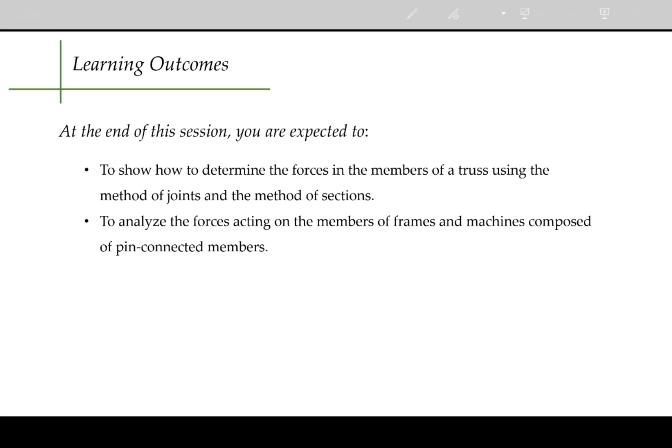Let me just go over my slide for frames. Okay, frames.

Frames and machines are two types of structures which are often composed of pin-connected multi-force members, such as members that are subjected to more than two forces. Frames are used to support loads, whereas machines contain moving parts and are designed to transmit and alter the effect of forces. Provided a frame or machine contains no more supports or members than are necessary to prevent its collapse, the forces acting at the joints and supports can be determined by applying the equations of equilibrium to each of its members. Once these forces are obtained, it is then possible to design the size of the members, connections, and supports using the theory of mechanics of materials and an appropriate engineering design code. This part, designing the size of the members, is covered under mechanics of materials, for which statics of rigid bodies is a prerequisite.

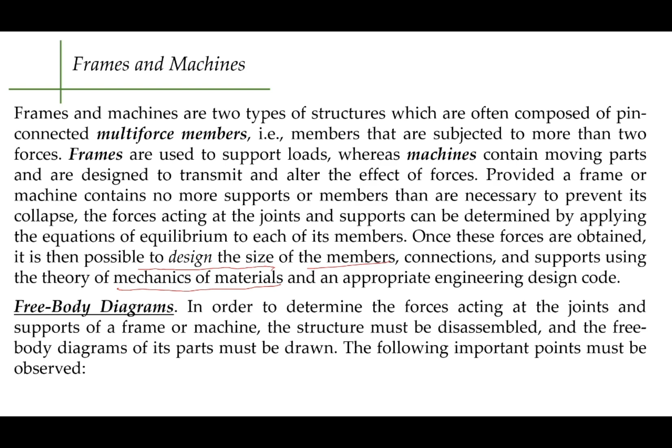So how are we going to solve for frames and machines? First, free body diagram. In order to determine the forces acting at the joints and the supports of a frame or a machine, the structure must be disassembled and the free body diagrams of all its parts must be drawn. The following important points must be observed: 1. You have to isolate each part by drawing its outlined shape. Don't worry, I will have an illustration later on.

Then show all the forces and or couple moments that act on that part. Make sure to label or identify each known and unknown force and couple moment with reference to an established X and Y coordinate system. Also, indicate any dimension used for taking moments.

Most often, the equations of equilibrium are easier to apply if the forces are represented by their rectangular components, because we will be doing summation of forces x equals 0, summation of forces y equals 0, and summation of moment equals 0. Following the Varignon theorem, it is much easier to solve if your forces are resolved into x and y components, because the perpendicular distances of these forces are much easier to locate.

Identify next all the two force members in the structure and represent their free body diagrams as having two equal but opposite collinear forces acting at their points of application. For a discussion on two force members, please go over the equilibrium of a rigid body discussion. By recognizing the two force members, we can avoid solving an unnecessary number of equilibrium equations.

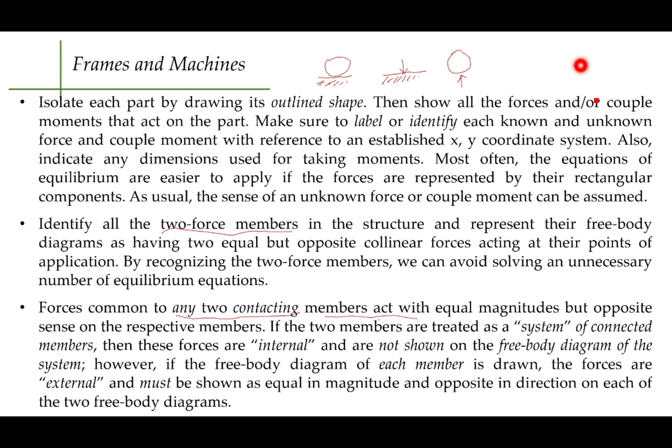Now, for this part here, common to any two contacting members. Say, for example, if you have your roller here and then your surface. If you look at it in the perspective of your surface, your roller will exert a downward force. But in the perspective of your roller, your surface exerts an upward force. This is to maintain equilibrium. This is what it means when I say forces common to any two contacting members act with equal magnitude but opposite sense on the respective members.

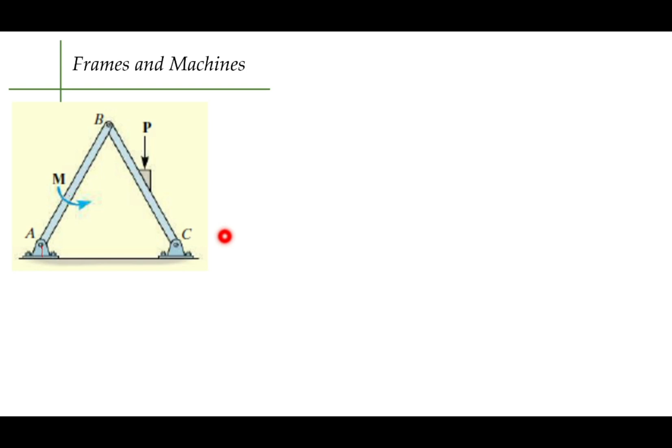This is an illustration here. Let's say we have this frame, we have a load P here and a couple moment at this point. First and foremost, you have to determine the support reactions. Both A and C are pin connected. So let's say we have a force here, force here, force here, force there. We have AX, AY, CX, CY. Because we're going to apply the equilibrium equations, we can determine AX, AY, CX, and CY.

But there are certain cases where, from this initial writing of your forces, you cannot determine your support reactions yet. So you have to dissect more deeply into your frame. For example, this one, we'll have one member here, this member, and another member.

Now for member AB, we retain our AY going up, AX going to the right. Now, if we say that our BY at member AB is going down and BX is to the left, then when you proceed to the next member, BC, you have to make sure that your BY and BX follow the opposite of the firstly assumed direction. So for BY at member AB, you assumed going down, so at member BC it has to be going up. And for BX in member AB, to the left, so at member BC it has to be to the right. That is how you maintain equilibrium when dissecting your frames.

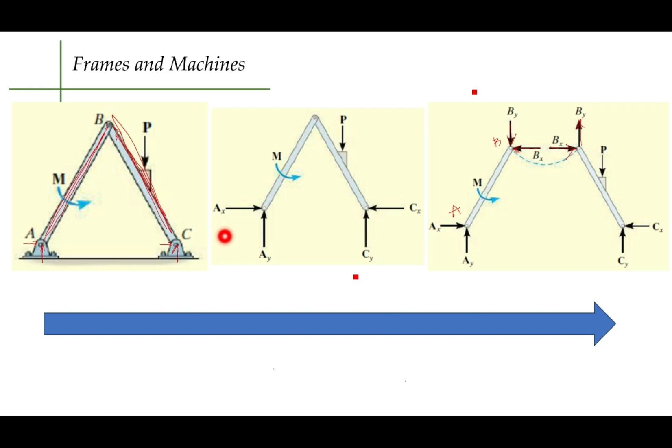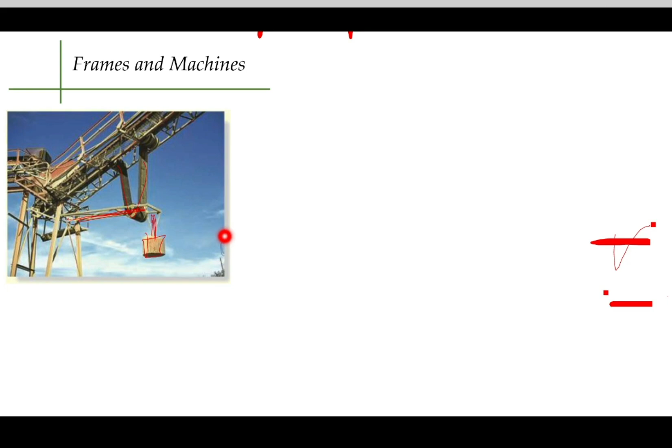Next, let's say this part here, you have your weight and then belt. Okay, what's this?

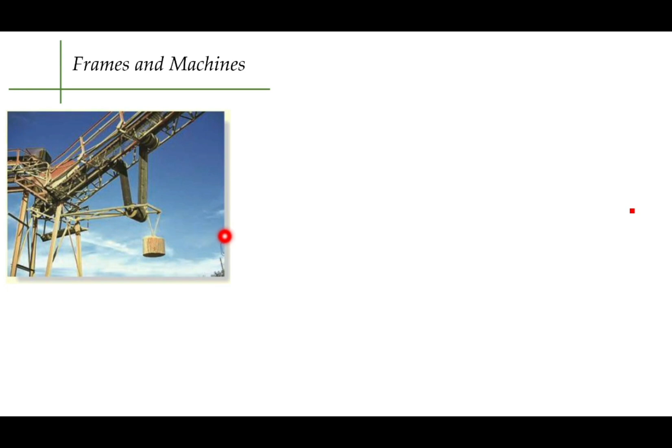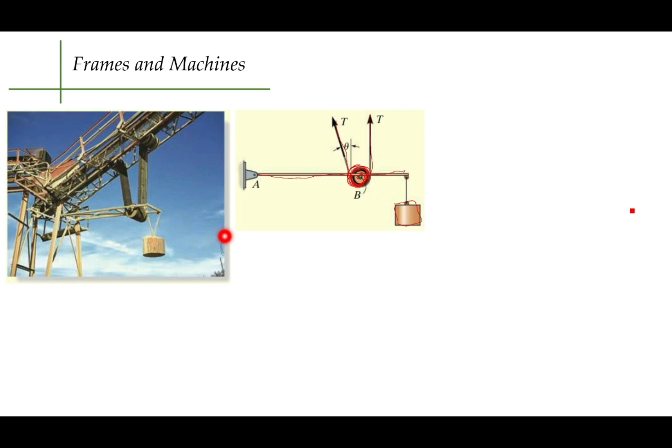We have this. We have our belt here, tension, and then the weight. We'll have two parts of our frame here: this part, the roller, and this part together with our weight. This part going down for our weight, and then our support reactions AX and AY. Now, of course, our roller is pin connected to our member AB, so we'll have a y and x component. If we assume that our BY, where the pin is located, is going up and BX is going to the left, then if we do our analysis at the roller, it has to be opposite. So BX is to the right and BY is going down, to maintain equilibrium. By this, we can now solve for all of our unknowns.

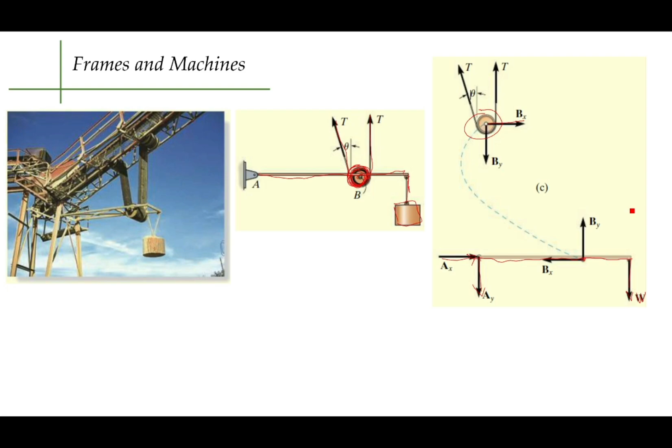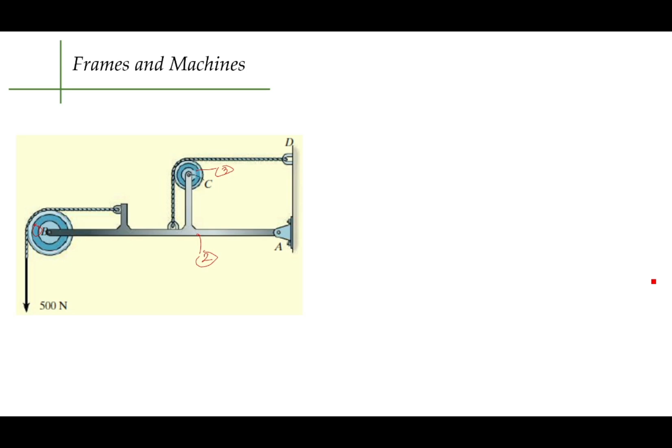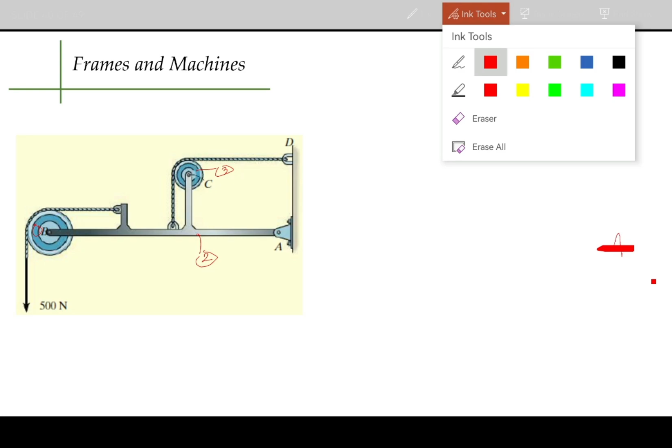Another one, this one. So we'll have how many members, how many frames, part of our frame. We have this roller here, this entire thing, and then this as well. We'll look for our reactions first. So we have 1, 2, and 3.

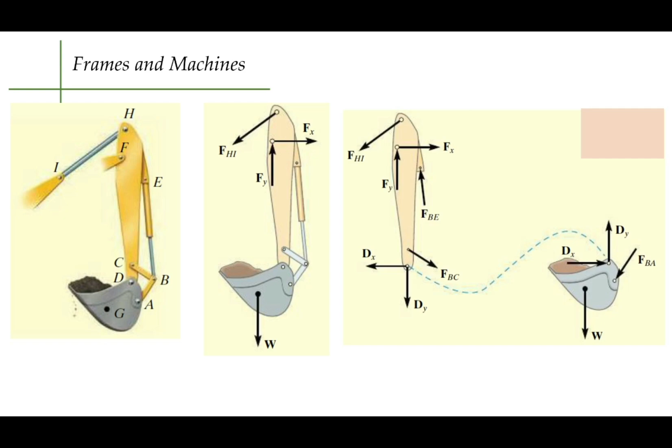Another example here. Now this is the widely accepted procedure. But again, if you guys are able to look for procedures that are best suited for you, then I am very much open to that, provided that it is mathematically correct and logically correct.

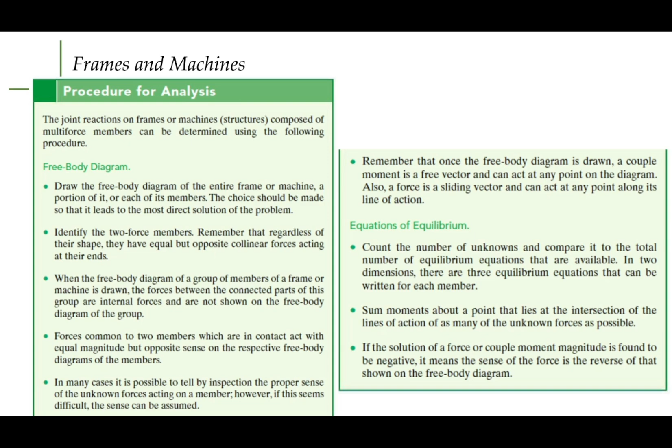Just have, again, the same thing: you just have to dissect your frame, draw the free body diagram, label it properly, and label also the dimensions, especially if you'll be doing moment summation. Then you apply all of the equilibrium equations. We'll have different numerous examples for frames and machines, so go over each of the videos. Thank you.